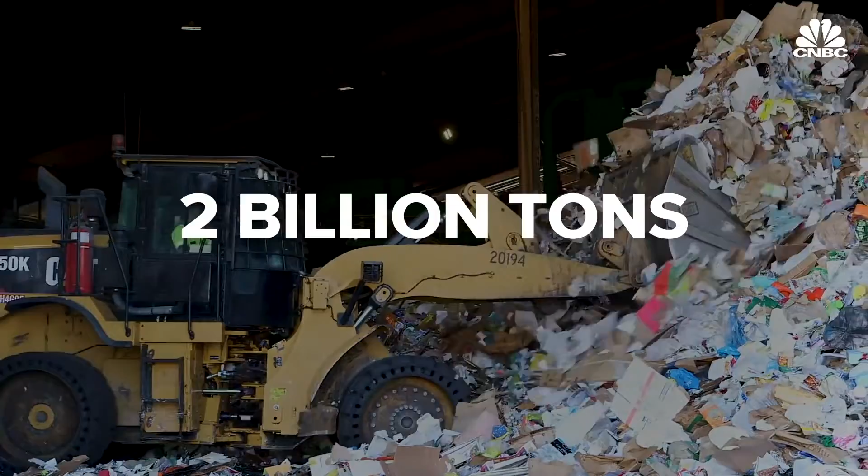Our society produces a lot of waste, over 2 billion tons per year, a number expected to grow by 70% by 2050. That's a line of garbage trucks stretching from San Francisco to New York City every single day.

Organic materials in landfills decompose and produce methane, a very potent greenhouse gas. Solid waste, plastics, paper, cardboard, there's a lot of energy within those, carbon and hydrogen. Why don't you do something useful with it?

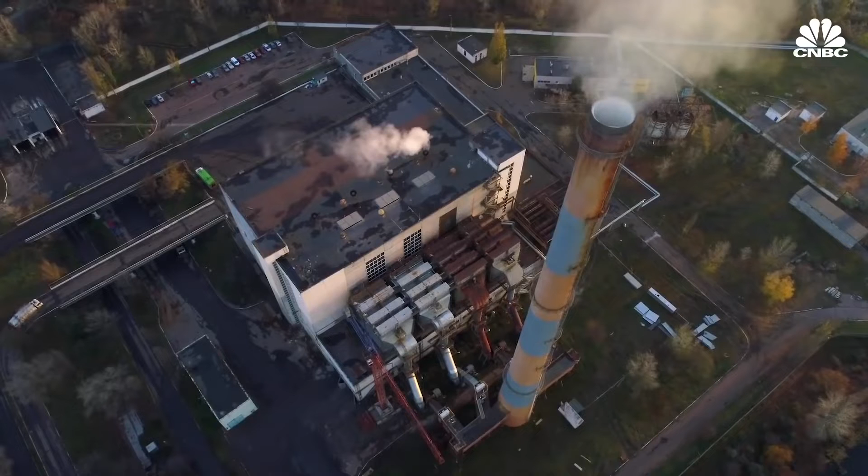Converting waste into energy is not a new idea. Usually, though, this has meant incineration, burning our trash to recover some energy. But that has major drawbacks. Incineration creates toxic ash and hazardous chemicals called dioxins, and heat and electricity are pretty much the only usable outputs.

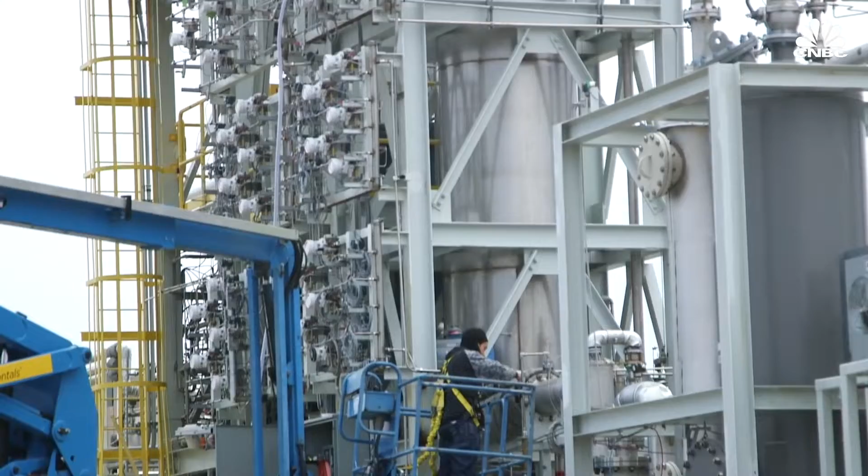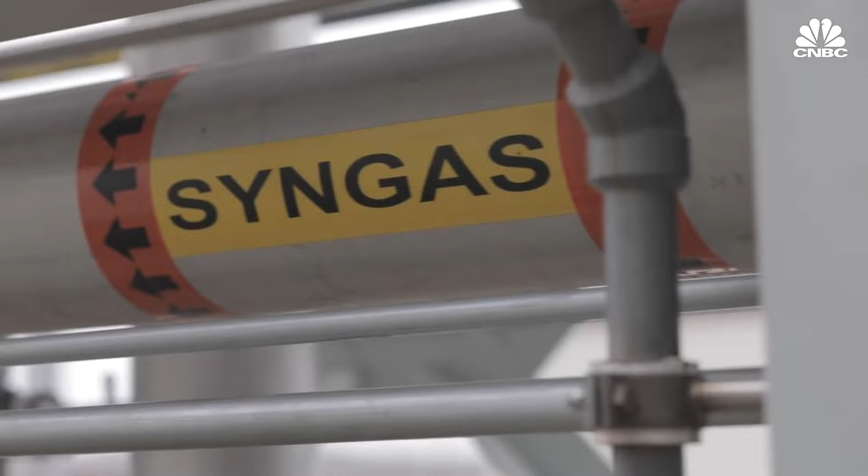A better solution may lie in gasification, an old technology recently repurposed to deal with our waste. Gasification companies don't burn trash. Instead, they turn it into a gas, in a process they say is both economical and eco-friendly. The focus is on producing a good quality syngas that can be converted into higher value energy products on the back end, be it electricity, hydrogen, diesel fuel, possibly even chemicals, fertilizer, etc.

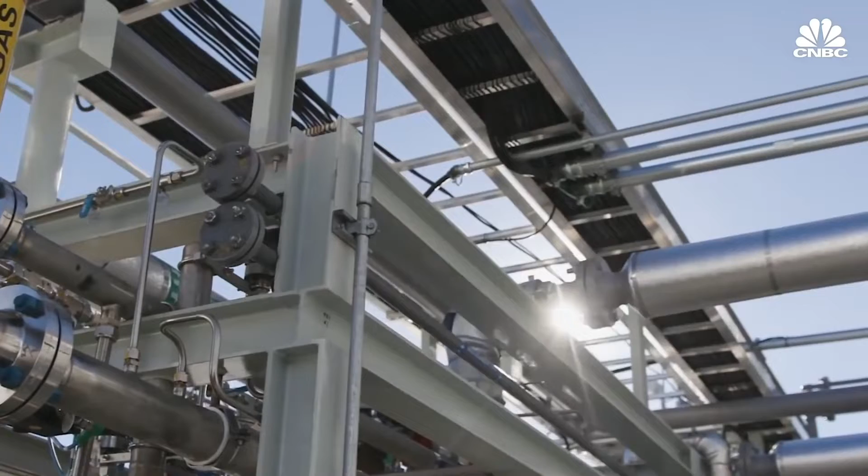It's an exciting idea, and some major players, including the Bill Gates-led fund Breakthrough Energy Ventures, have thrown their weight behind it.

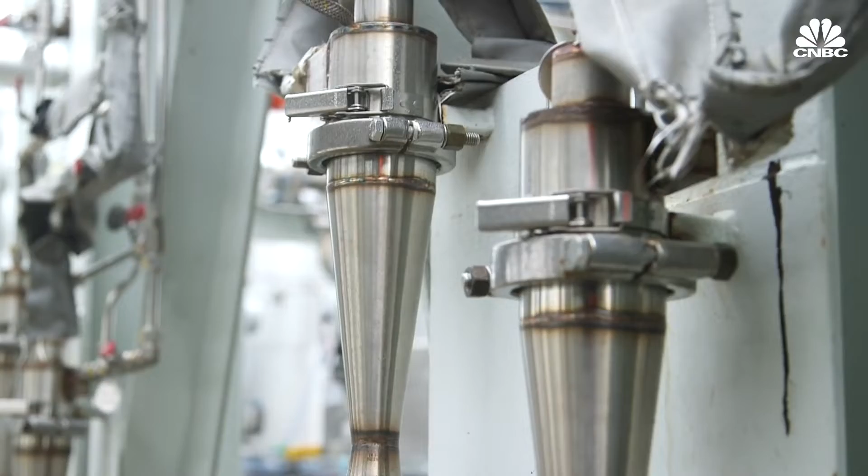While in the past gasification companies have struggled to scale up and meet their energy production targets, now companies like Sierra Energy, Enerkem, and Plasco say they're ready to commercialize and expand. I think we have over 9,000 interested parties from around the world who've contacted us already. The question is, how quickly can we get one? The answer is soon.

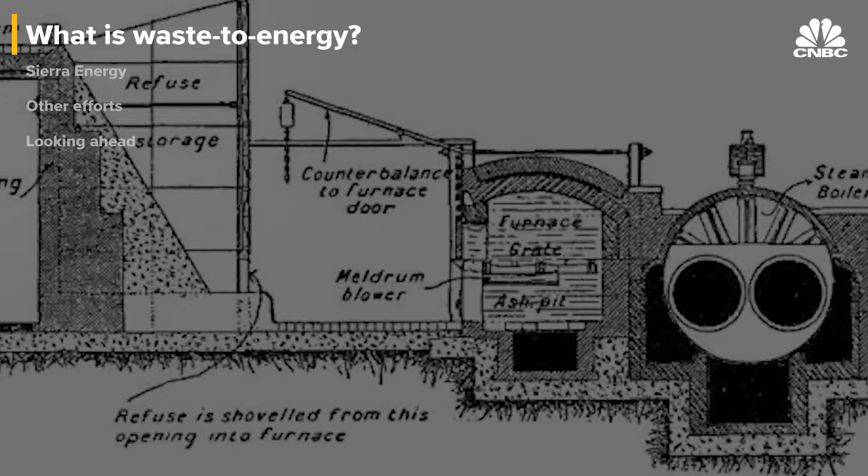The world's first municipal waste incinerator was built in 1874 in Nottingham, England. And like incinerators of today, it converted trash into ash, gas, and heat via combustion. Initially, the purpose was just to shrink our waste.

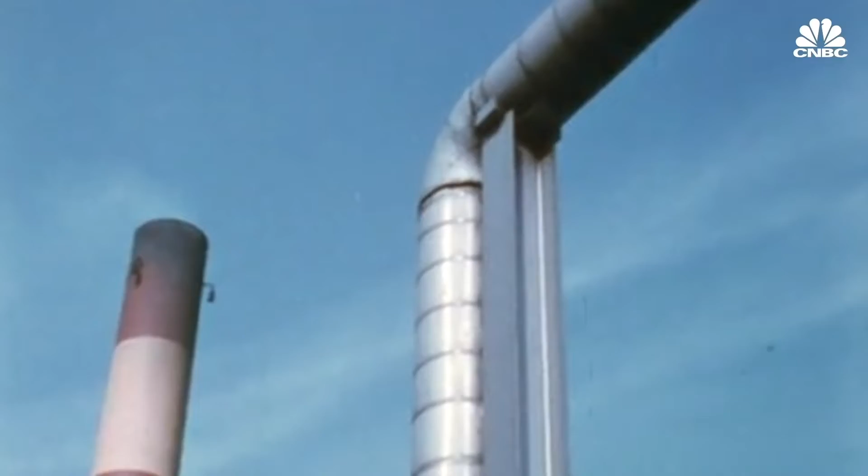Eventually, though, Great Britain and Germany did start recovering energy from the process, but the idea didn't really catch on in the US. Domestic electricity prices were already low, and as emission standards tightened, incineration got even more expensive compared to landfilling. It wasn't until the oil embargo and resulting energy crisis in the 1970s that the US really took an interest in waste-to-energy tech.

Over 100 waste-to-energy incineration plants were built, but when fuel prices dropped, interest waned. You see a lot of interest in this waste conversion or biomass conversion when the fuel price is really expensive. And then when the fuel price drops, nobody really cares.

Today, there are about 70 waste-to-energy plants in the US, and the number is declining. But globally, many European countries still rely heavily on incineration, and Japan and China have been building waste-to-energy incinerators at a rapid clip. But many environmentalists say we need a better solution.

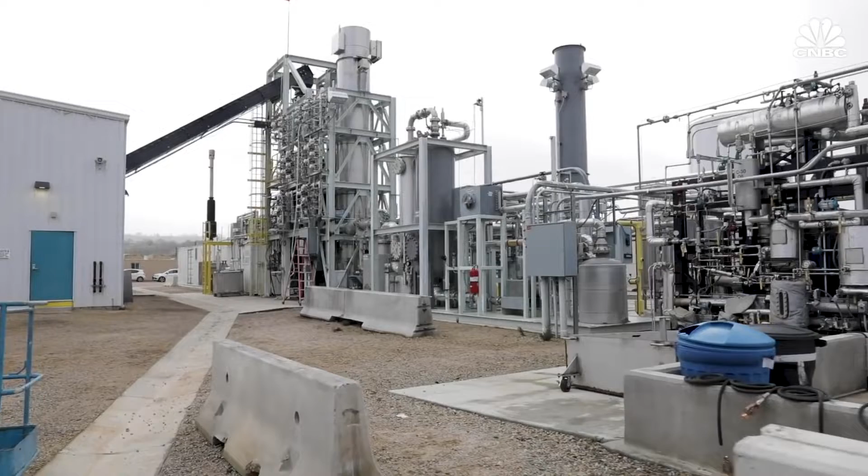Incinerators still emit harmful pollutants, especially in countries with lax environmental regulations. So burning waste to get rid of it may appear to be cheap, but the long-term health consequences for the community are terrible. So companies like Sierra Energy are looking towards gasification, an old technology that proponents hope to repurpose as a cleaner and more economical waste-to-energy solution.

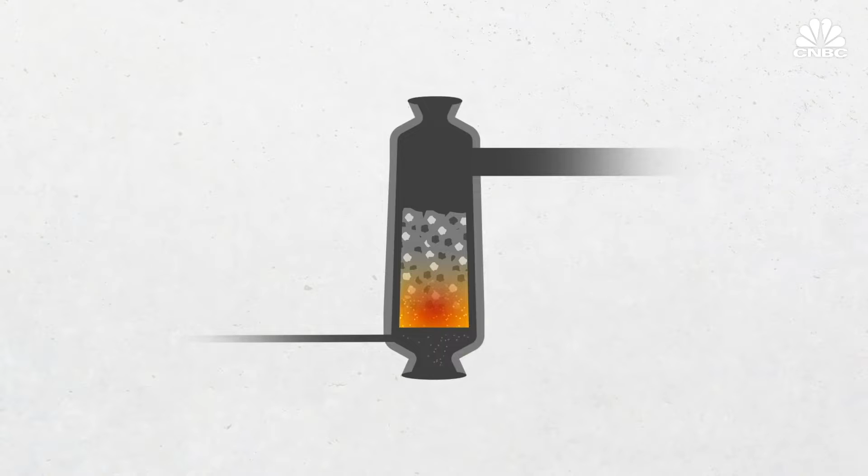In the gasification process, materials aren't combusted. No toxic ash or dioxins are produced. Instead, a highly controlled amount of oxygen or steam reacts with the waste, turning it into a gaseous mixture of carbon monoxide, hydrogen, and other elements.

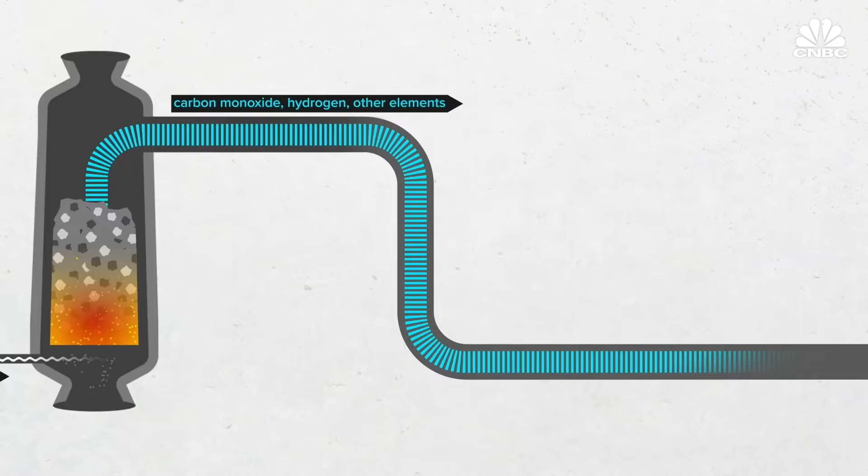This synthetic gas has applications beyond electricity generation. It can be converted into high-value products like diesel fuel, hydrogen fuel, or ethanol. So even if electricity prices stay low, there'll be a market for these outputs.

We see much more value in chemicals and biofuels. Methanol is an important building block in the chemical industry. Ethanol, of course, can be blended into fuels.

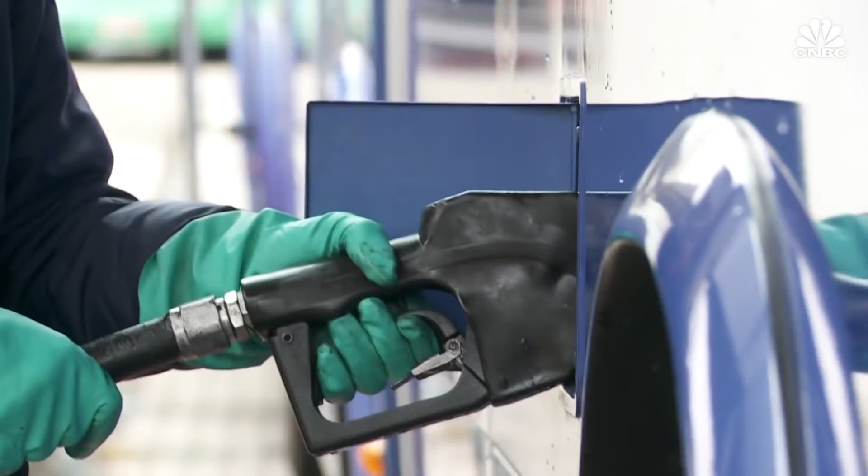In this way, waste-to-energy gasification plants have both upstream and downstream revenue potential. On one side, you're being paid to take garbage that normally would be dumped into a landfill, so that's one source of revenue. You then take that waste and turn it into recycled products. Those products have very high value. So from a business model perspective, you're getting paid on both ends.

But a main challenge facing companies like Sierra Energy, Enerkem, and Plasco is dealing with the unpredictability of using municipal solid waste as the fuel.

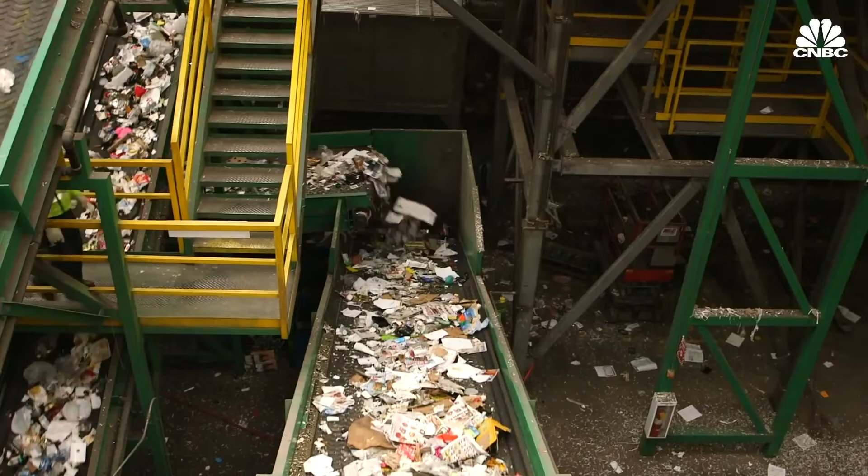Globally, there are hundreds of gasification plants that generate electricity from fossil fuels like coal, but waste-to-energy gasification is a whole different game. Tailoring your gasification when your fuel changes over time is the holy grail. And if they can consistently gasify and produce their syngas from these waste materials, even if the content changes, that's an exciting option. Here are some of the main players taking that plunge.

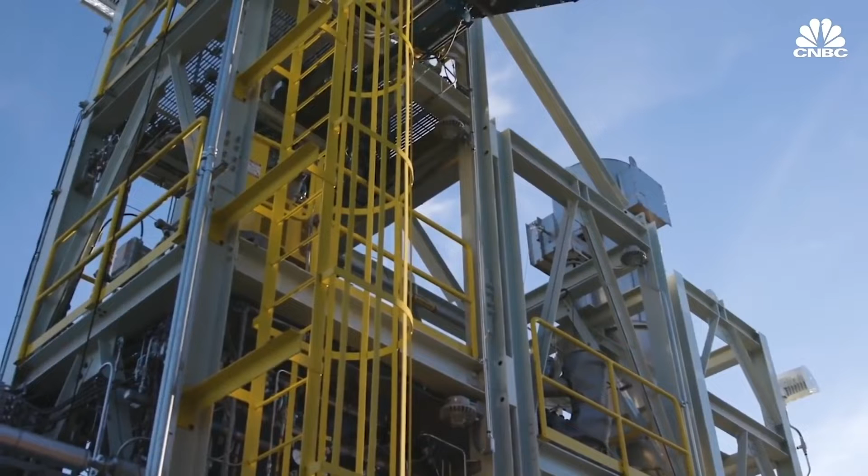Davis, California-based Sierra Energy was founded in 2004. Back then, CEO Mike Hart, who is also CEO of Sierra Railroad Company, was seeking to improve the fuel efficiency of his locomotive fleet. We were trying to figure out a way to make our own fuel. We wanted to do something better than diesel.

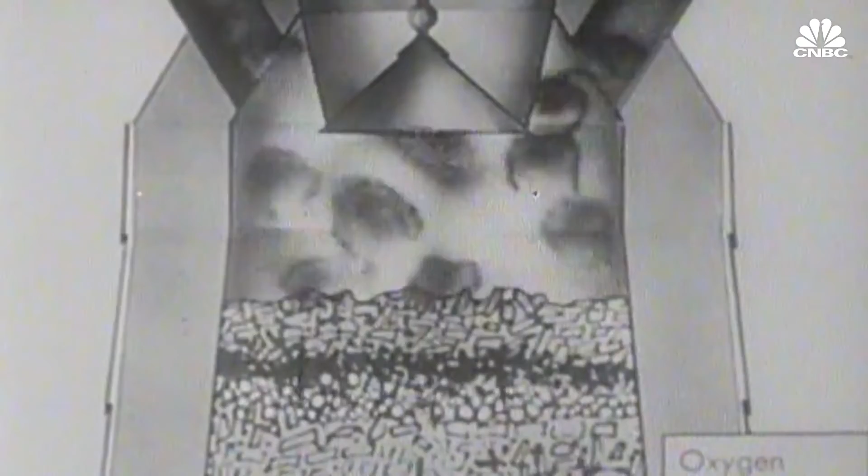He was judging a business competition at UC Davis when he heard about how blast furnaces, one of mankind's oldest technologies, could be used to convert any mixture of materials into a usable synthetic gas. Hart bought the patents to this technology, and Sierra Energy was born.

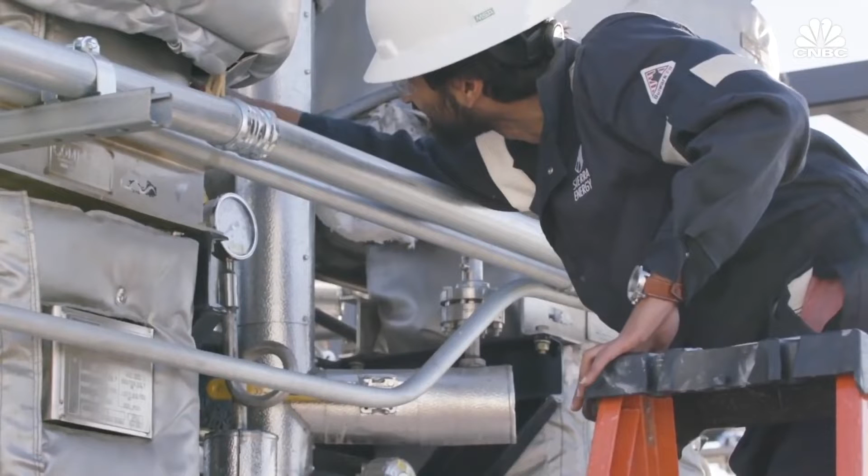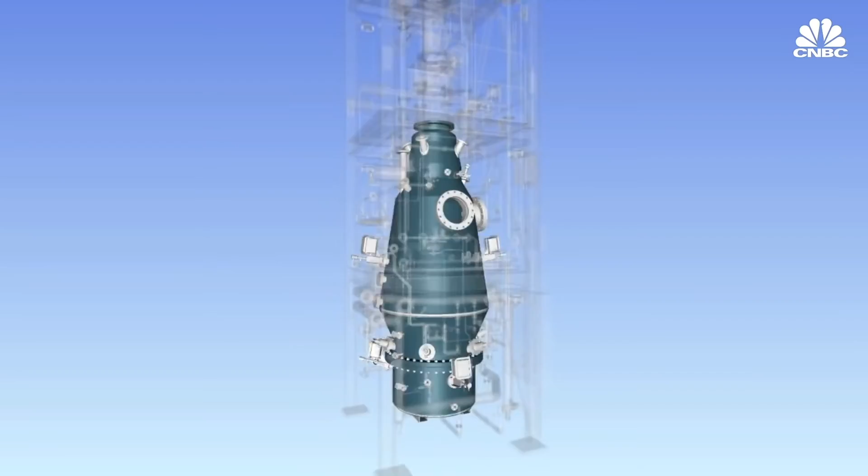Over time, its mission expanded far beyond its initial reach. People are realizing that climate change is a very real problem. When you throw away one ton of garbage, about 6.2 tons of CO2 equivalent goes into the atmosphere in the form of methane. Methane is 86 times more potent a climate change gas than CO2 over a 20-year period. Our technology provides one way of trying to address that problem.

Last July, Sierra Energy closed its $33 million Series A funding round, led by Breakthrough Energy Ventures, the Bill Gates-led investor fund that also includes Marc Benioff, Jeff Bezos, and Richard Branson. Now the company has partnered with the Department of Defense to develop its first small-scale commercial facility at Fort Hunter Liggett in Monterey County, California. This demo facility can handle 10 tons of waste per day, and if all goes according to plan, it will begin processing trash in early 2020.

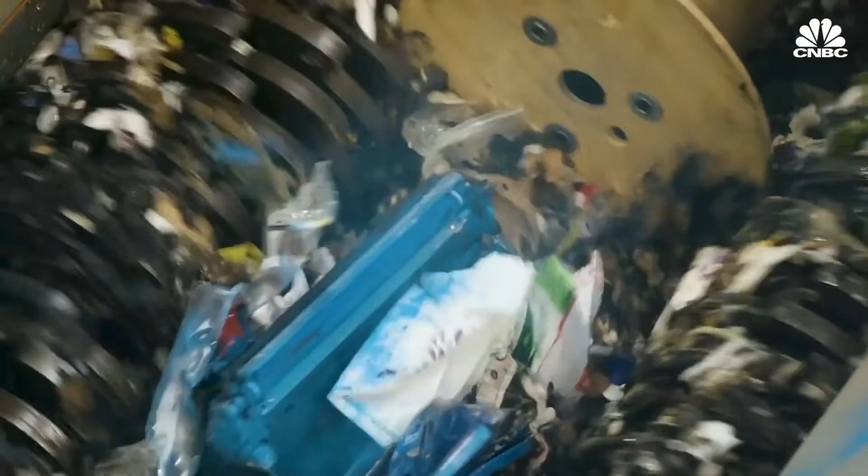Ultimately, Sierra Energy says what sets them apart is their use of the blast furnace, a centuries-old technology in the iron and steel industry. Here's how it works.

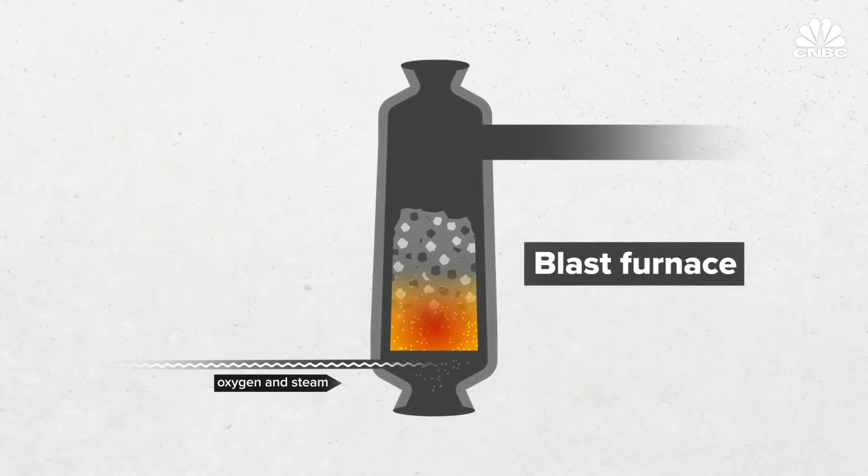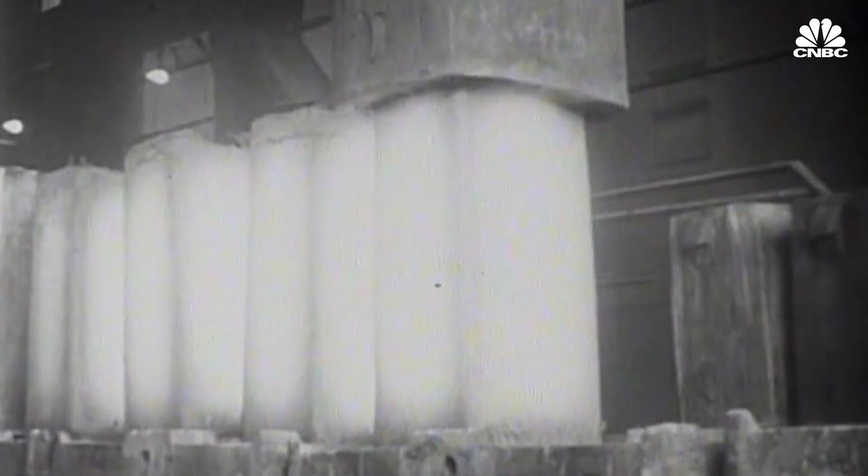A blast furnace, which is the technology platform Sierra Energy uses, is a high-temperature vessel. Solid materials go in at the top, injectant gases are placed in at the bottom, and you have a big countercurrent heat exchanger. We're injecting oxygen and steam at the base instead of hot air, and at the top we're placing in solid waste materials instead of mined materials from the ground. And instead of the focus being producing good quality metal out the bottom, our focus is on making a good quality syngas, synthesis gas, out the top of the vessel.

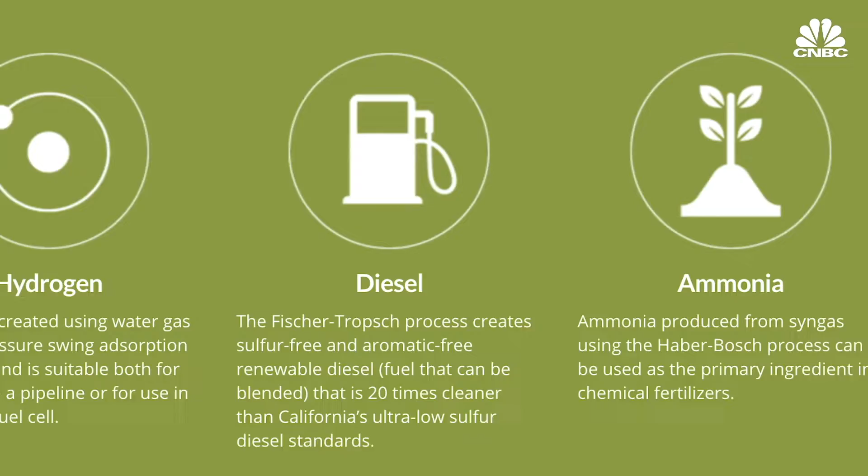Once the syngas is produced, the local community or developer will decide what to do with it. The company lists electricity, hydrogen, renewable diesel fuel, and ammonia as likely end products. About 10% of the waste material can't be converted to gas, and so is instead turned into a stone that can be used as construction material.

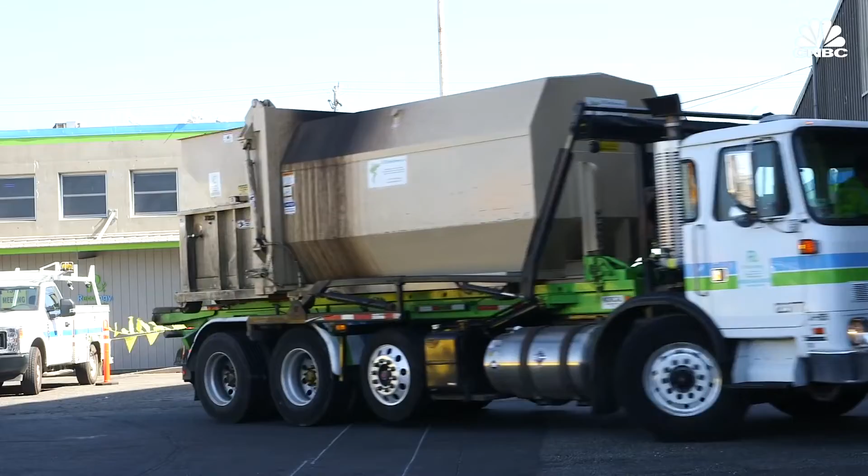Because of this wide variety of use cases, it's hard to say for sure exactly how clean the end-to-end process will be. It really depends on the specifics of the project, how far waste has to be brought to the location, and some of the configuration of the plant itself. Hart is confident, though, that in almost every case it will be carbon negative, because even if you're making electricity or diesel for a vehicle, the amount of pollution that comes out of the tailpipe or smokestack is less than the amount of emissions you're offsetting in the first place.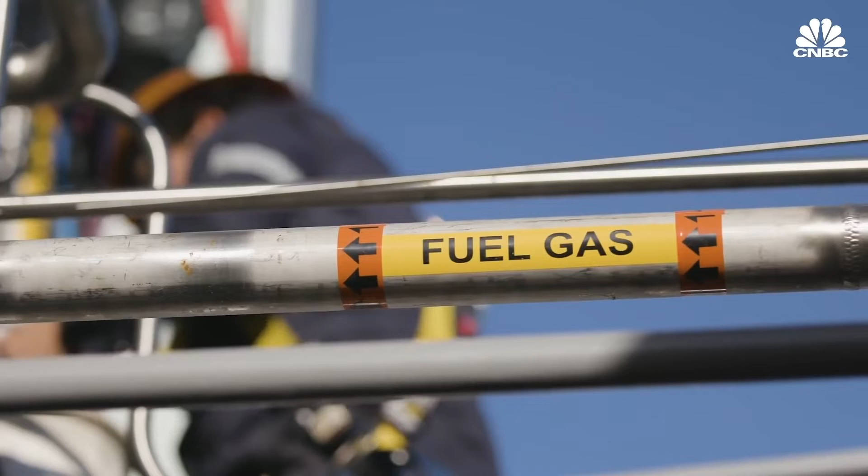Furthermore, Sierra Energy's plant doesn't rely on external energy to operate. Instead, Hart says that about 20% of the energy created is used to run the plant itself. And so by some people's analysis, you can make this carbon negative or carbon neutral. By other analysis, you can't quite get there, but it's certainly cleaner than fossil natural gas.

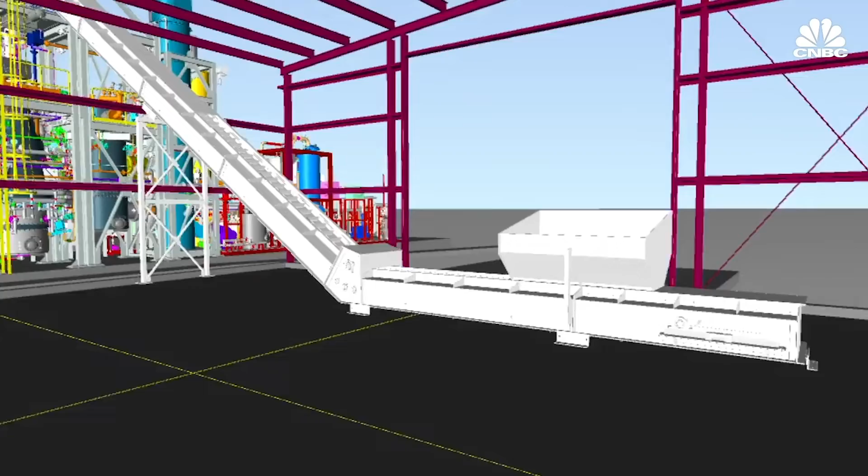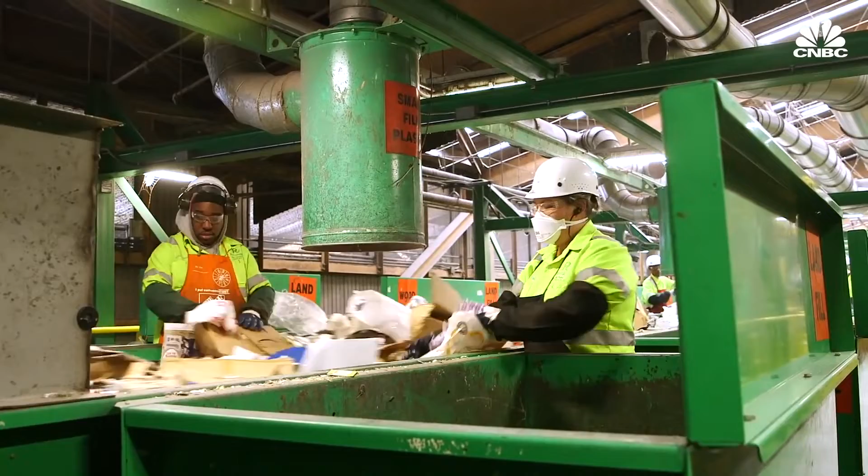Over the next few years, Hart says the company plans to build out community-scale systems that can handle about 50 tons of waste per day, the equivalent of approximately 50,000 people's trash. If we want to have an impact on that 13.2 billion tons a year of greenhouse gas, we need to have thousands of these systems around the world as quickly as possible. That's our goal as a company.

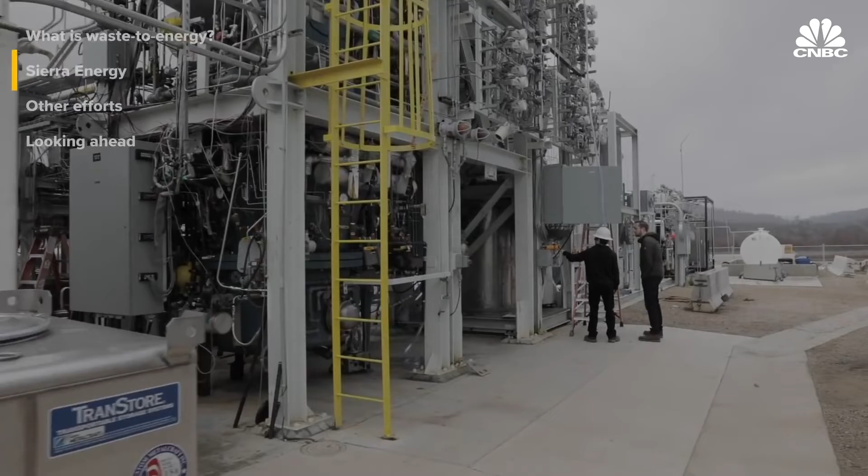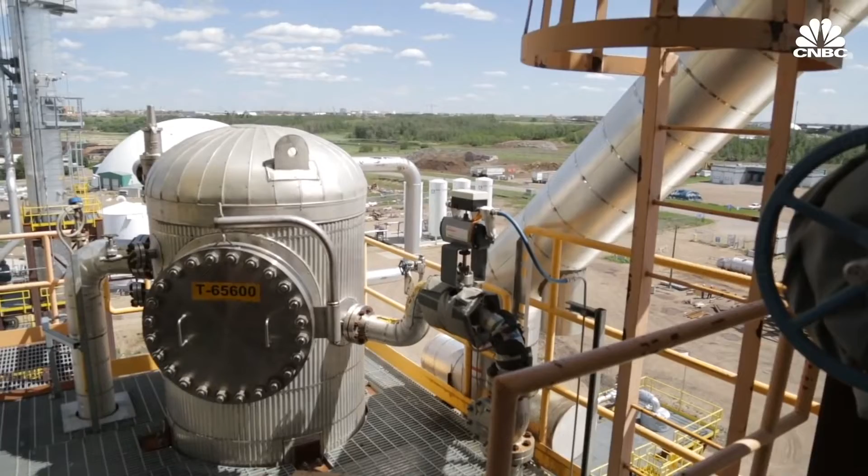While Sierra Energy's most recent funding round has put it in the spotlight, there are a number of other veterans in this space. Two of the biggest are Plasco Conversion Technologies, founded in 2005, and Enerkem, founded in 2000. Like Sierra Energy, both aim to turn municipal solid waste into valuable end products through gasification. But unlike Sierra Energy, these two companies have actually accumulated years of firsthand experience operating full-scale gasification plants, dealing with their fair share of delays and setbacks along the way.

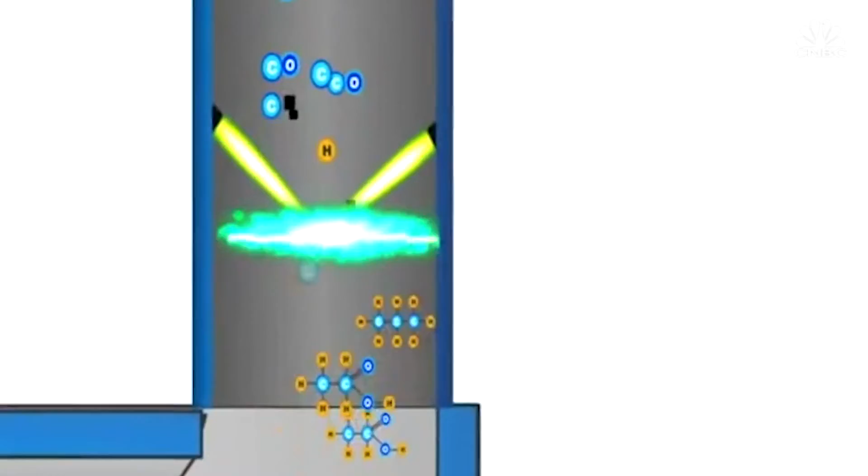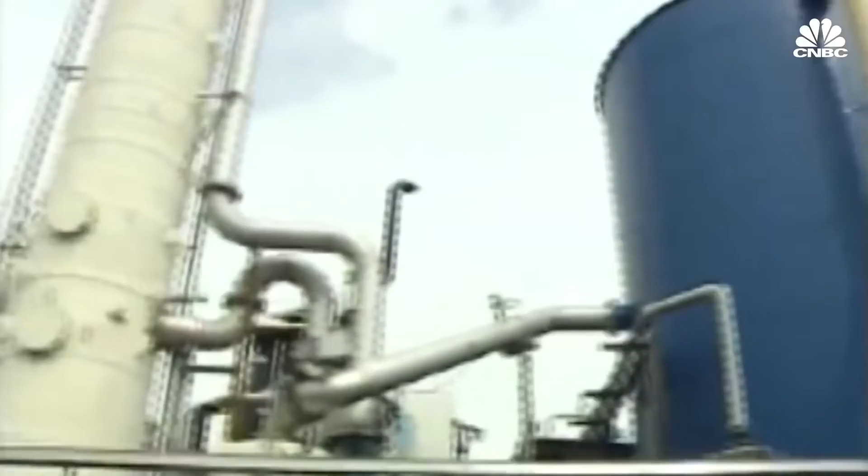Plasco Conversion Technologies uses plasma to refine the waste from gasification into a clean syngas. The company operated a large demonstration facility in Ottawa from January 2008 to January 2015, capable of accepting 135 tons of waste per day. Eventually, Plasco got approval to build a commercial-scale plant, and though the company raised over $300 million, it ultimately wasn't enough. The new plant was never built, the demo facility shut down, and Ottawa severed ties with the company.

But Plasco kept chugging along and re-emerged with a new outlook on the market. We put in 1.2 million man-hours and a decade of work and $407 million. We can tell you many ways it don't work, and what we do now does work.

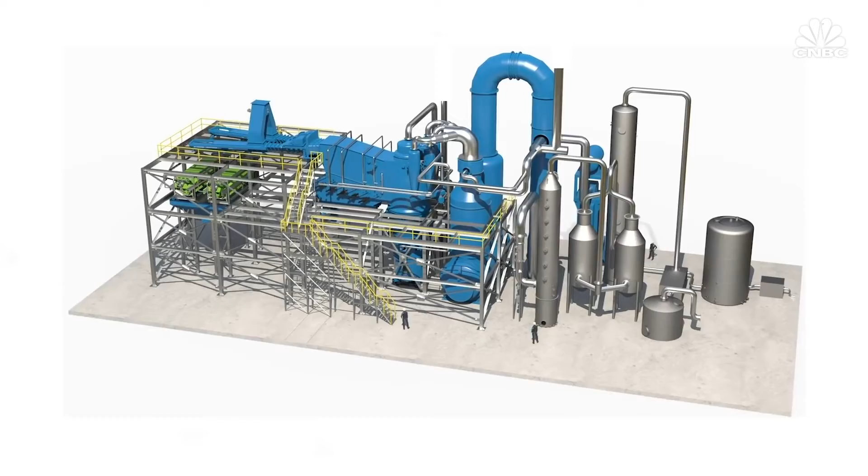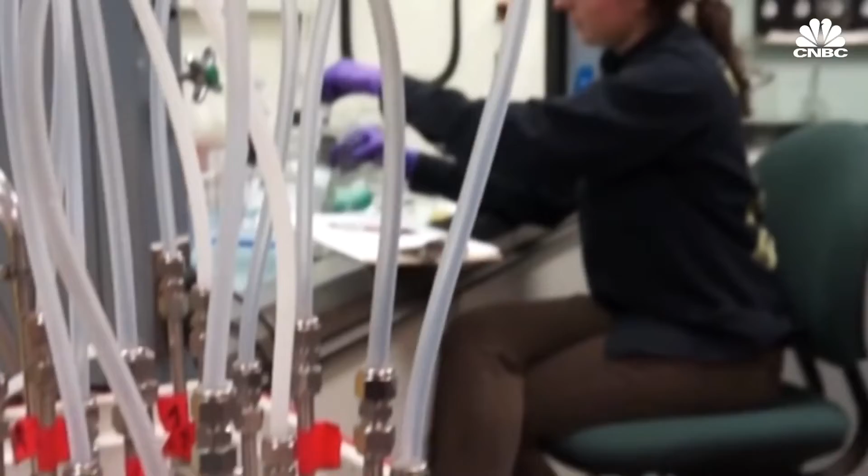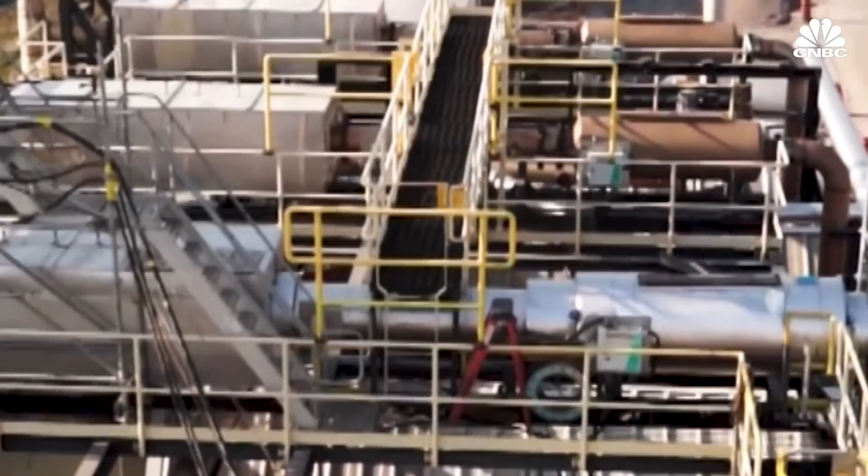In the process, we realized that the waste to electricity market, the waste to energy market, was going away. Unable to compete with the low price of natural gas, Plasco now aims to produce synthetic fuels for use in internal combustion engines, which can power cars, planes, and trains. The company no longer operates any plants, but it says there are a number of projects in the works.

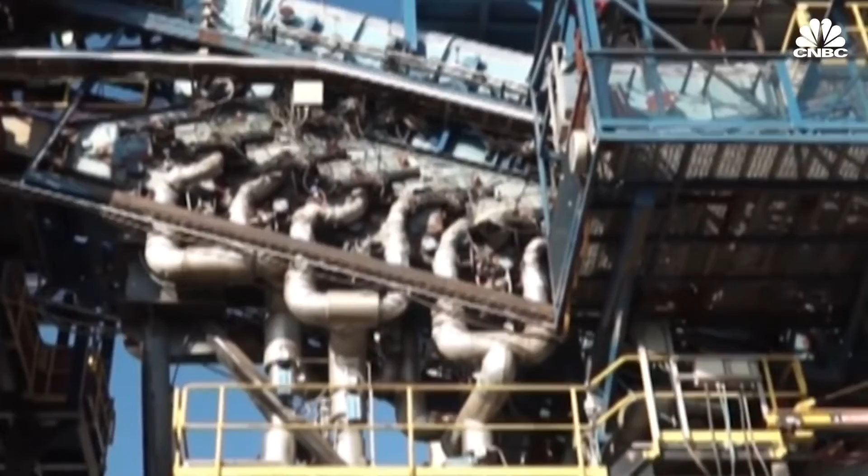And for these future endeavors, Plasco has slimmed down its business model. We aren't doing build, own, operate, transfer anymore. We're doing selling the equipment and the technology. So we restricted what we did so we weren't in competition with the entire world, but more in cooperation.

Another player, Enerkem, developed the world's first commercial waste-to-biofuels facility of its kind. It's been operating in Edmonton, Canada since 2014, and is currently focusing on turning trash into ethanol biofuel and chemicals like methanol. It's a facility that can take up to 100,000 tons per year of waste, around 300 tons per day. So this type of size would represent a community of around 500,000 to 700,000 inhabitants.

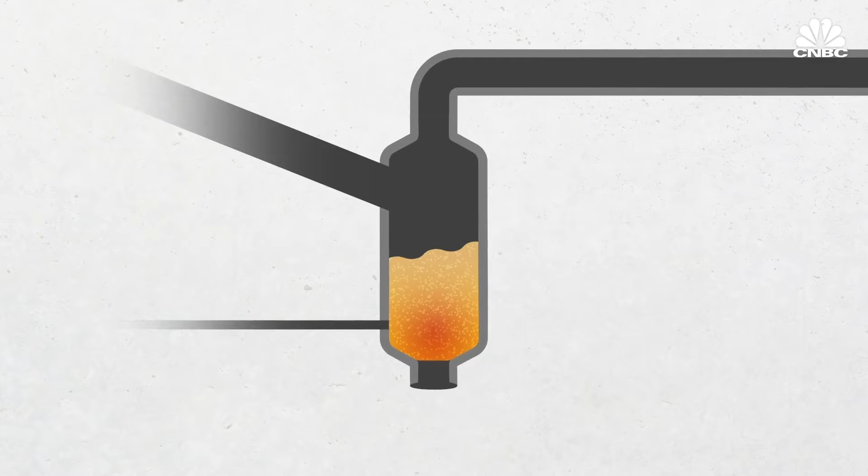This plant uses a technology called a fluidized bed gasifier, in which the trash is dropped into a bed of hot sand, oxygen, and steam. The precise mixture causes the waste to heat up and turn immediately into gas.

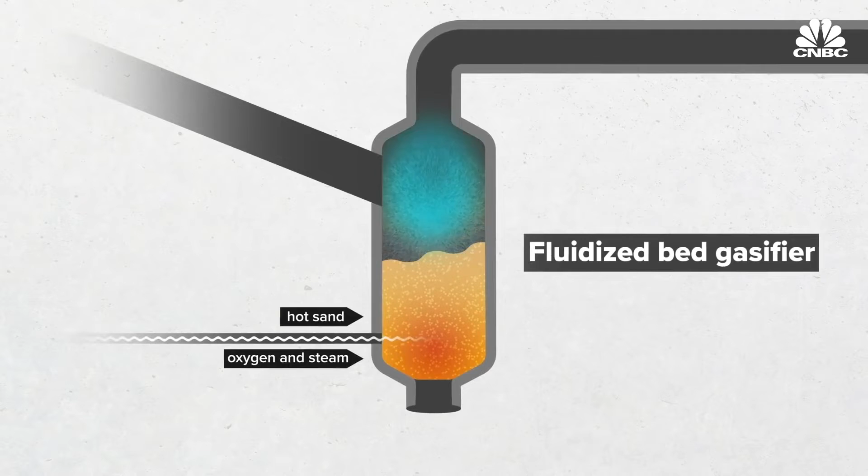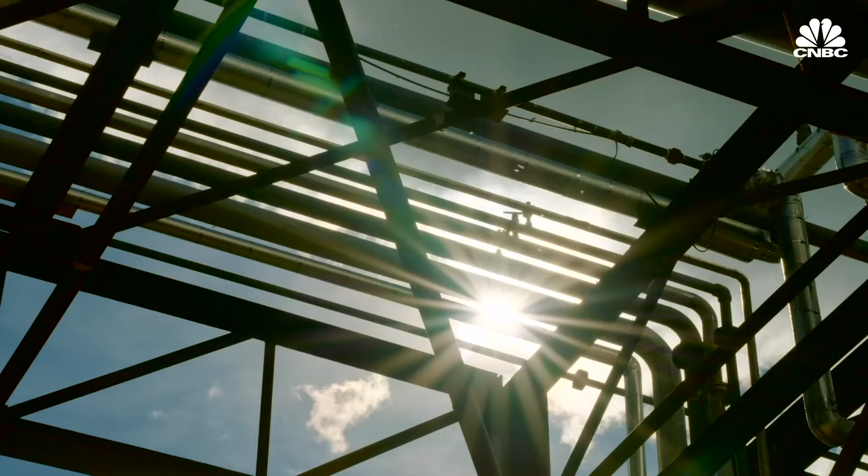But Enerkem has also faced challenges as it scaled up. The company initially predicted its first plant would operate at full capacity by 2012, but it still isn't there yet. The company won't reveal how close it is to full-scale operation, but Chornet says that despite the delays, he's glad that his company is taking the time to get it right.

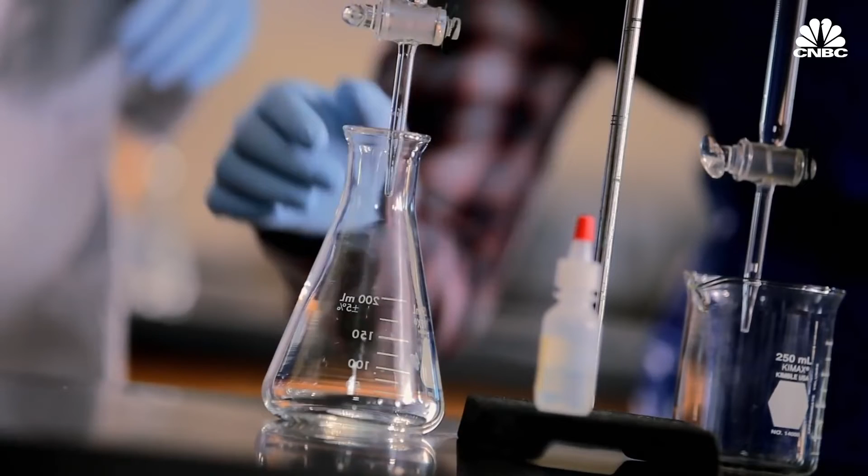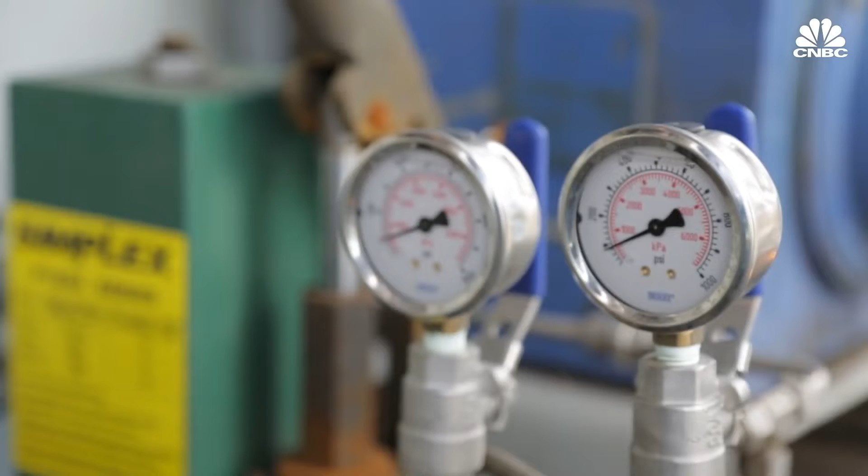We're really proud that we did not skip any steps. However, this comes at a cost. So we have both a patient approach and a realistic approach for innovations of this scale, and also we have an enormous database as well as operation time at commercial level. So these three aspects really differentiate us.

In its 20-year history, Enerkem has raised $616.5 million and now has plans to build additional facilities in the Netherlands, Spain, the UK, and Canada. It's one of the most well-established companies in the space, but with just one commercial facility, there's still plenty of room for others to play catch-up and learn from what's worked and what hasn't.

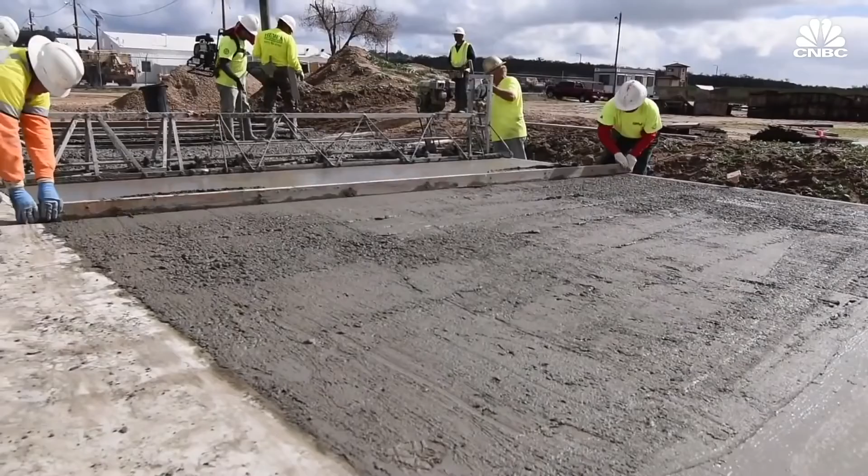Everyone likes to be in the race to be number two. The idea is the first plant, the pilot plant's more expensive, so you'd rather learn from somebody else. On this topic, I'm not at all worried. The first one at large scale may have some kinks in it, but it's also likely to get some of the best subsidies and deals from the municipality.

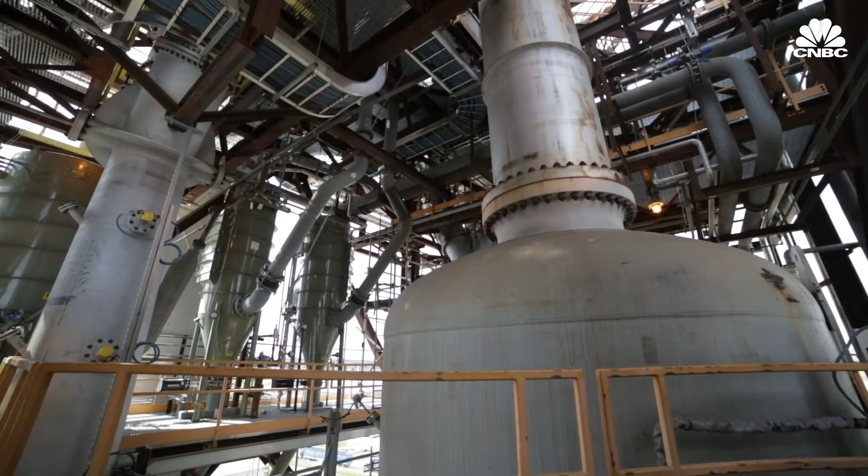These potential subsidies, alongside other policy drivers, stand to play a major role in determining how quickly this tech spreads. So the future for gasifiers is, in my view, more tied to the economics of the climate change story, the prices on carbon, the prohibitions on emitting any fossil fuels, than it is on the technology, which we've known about for a long time. Given current policies, such as California's low-carbon fuel standard, Sierra Energy says it could build many more plants, but not on the scale that they'd like to see eventually.

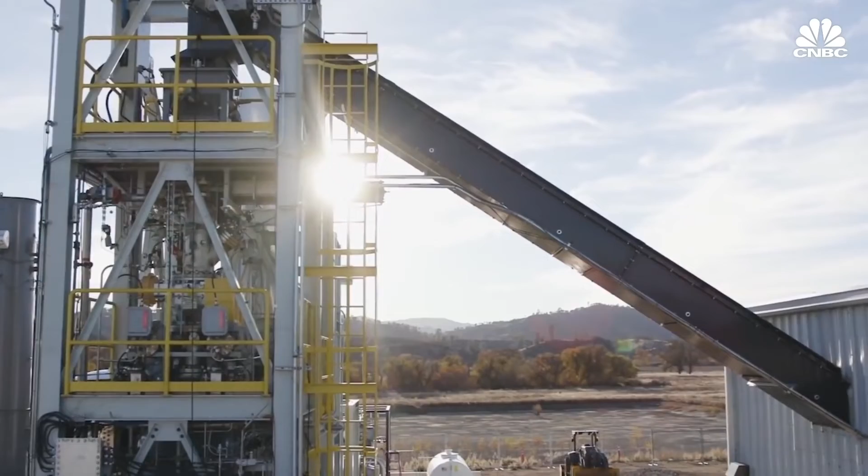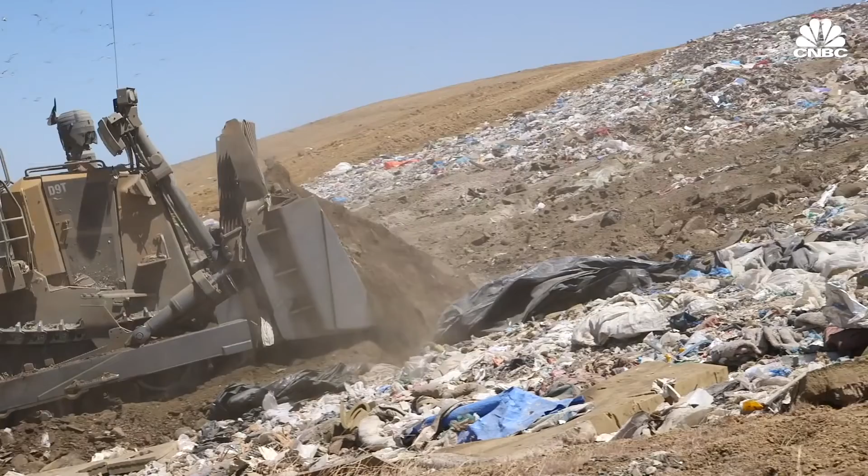To get to hundreds is very feasible, but to get many thousands, that will need different regions of the world to step up and force people to divert waste from the landfill. This could look like higher landfilling fees, carbon credits, carbon taxes, emissions regulations, or subsidies. Any and all would be a boon, so long as these gasification companies can operate as cleanly as they claim.

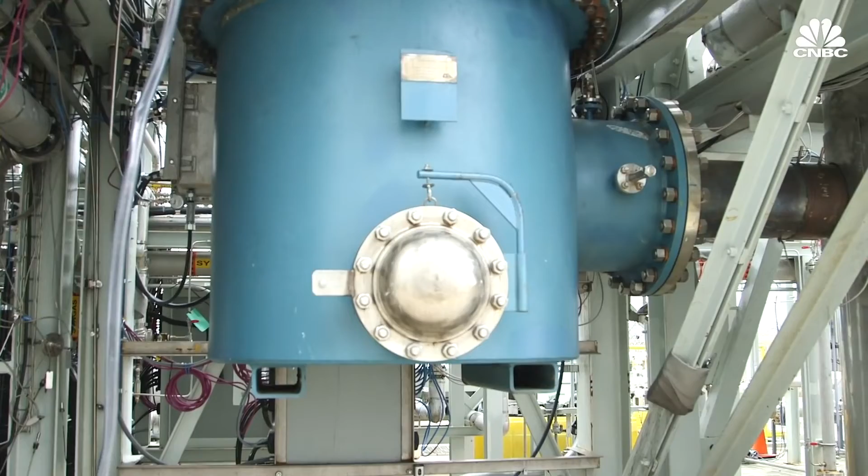But as climate policies and priorities shift in tandem with election cycles, it can be hard for this tech to establish a strong foothold. Once we know, okay, this is the policy that we're going to stick with for 10 years, I think there will be a lot of confidence for these investors. But if you don't know what the policy is going to be, every 2 years or 3 years or 4 years, it's very difficult to make any decision.